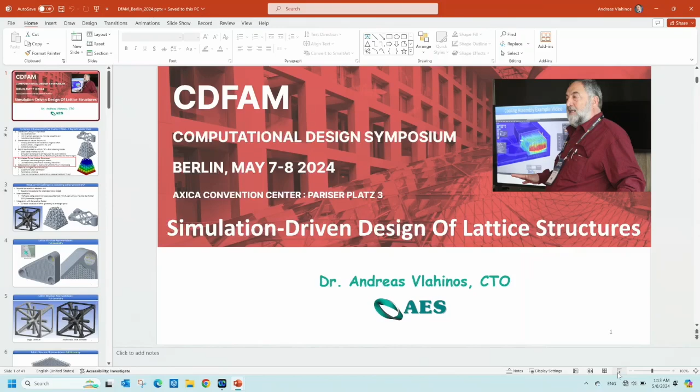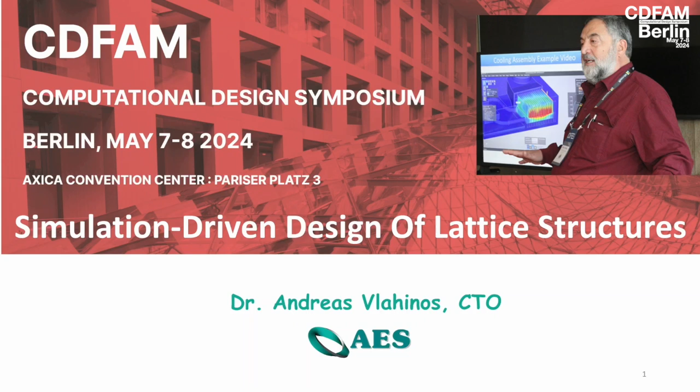And I can't stop working because these things are so much fun. We live in really exciting times. We do things we couldn't even dream or imagine before. Okay, so very exciting stuff. My first 2 decades, I was a professor at the University of Colorado, but I worked all the summers for the industry, so I was practical. In the last 20 years, I do consulting for defense and aerospace, especially solving new, unique, and difficult problems for SpaceX, Lockheed Martin, General Dynamics, BAE, practically all defense and aerospace contractors in US and some in Europe, like right here in Germany, Italy, Norway, I mean, all over the place. Because it's fun, I enjoy this stuff, and this is sort of, you can pass the enjoyment to others. We have a 3-day masterclass on these things.

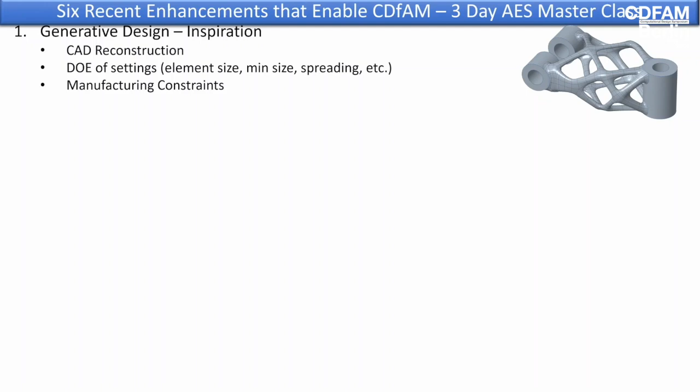What are they? First, generative design. Say, wow, that topology optimization has been around for 30 years. What's the big deal? It is a big deal because you can do CAD reconstruction with a push of a button. You can do DOE, design of experiments, on the factors we use to tune up, and you need the expert and the PhD guy to do it. You know, like element size, minimum element thickness, spreading, etc. So you do DOE so you can generate hundreds and hundreds of optimum feasible designs. So the task is, which one do I need after that? And of course, we have manufacturing constraints. We couldn't dream having print orientation direction with 45 degrees 6 years ago, okay? So super exciting. I won't talk about it.

Generation of lattice structures. Lattice structures are used in nature for a long time, but nature is a very good designer, okay? It has a lot more experience, failures, etc. But nature is a very good designer and uses lattice structures. We couldn't use them before. 6 years ago, we couldn't even imagine that. Why? Because we couldn't manufacture them. We couldn't even build them in CAD. Now we can. Super exciting, amazing geometries. And also, we have now custom lattices. You can visualize a dream of a lattice unit cell, make it custom, and use it.

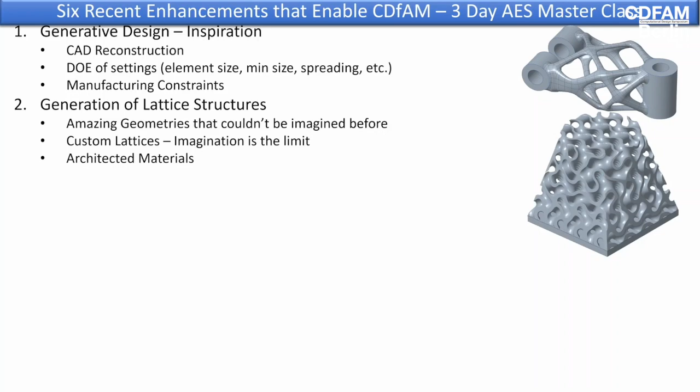And the other one, architected materials. Wow, you say, what's a big deal? The big deal is you can get properties for response, like mechanical properties, like stiffness, thermal conductivity, porosity, etc., which don't exist in nature. So if they don't exist in nature, how do you get them? Well, it's a combination of the materials. So we can get 0 coefficient of thermal expansion. It will be that exciting for the people. They fight thermal stress, you know, stuff like that.

Then the next big deal out of the 6 is real-time simulation tools. I'm in the industry for 40 years. I never thought I would be able to do real-time simulation, let's say conjugate heat transfer. Say, what is real time? Oh, you have a big computer. No, they use the GPUs, and they don't use finite elements. They use voxels. So what? Well, now I can do static, modal, thermal, CFD, conjugate heat transfer. So big deal. Okay, you can see it fast, but is it accurate?

We'll talk about it. Simulation results become features on the model tree. Because it's fast, if I regenerate the model, I can see the pressure drop. So what? Well, if it's a feature, I can do sensitivity, I can do optimization, I can do multi-objective design studies, I can do statistical design studies on the fly. I don't need additional software. And if you can do optimization, you don't just do good designs, you do great designs. I won't talk any more about these things. If you need this stuff, you take the class.

Simulation-driven structures, lattice structures. There are a lot of challenges there. We can generate amazing geometries, so we can grasp the form and the fit. But how about the function? Will it work? Will it break? Will it overheat? Will it vibrate? Will it flow?

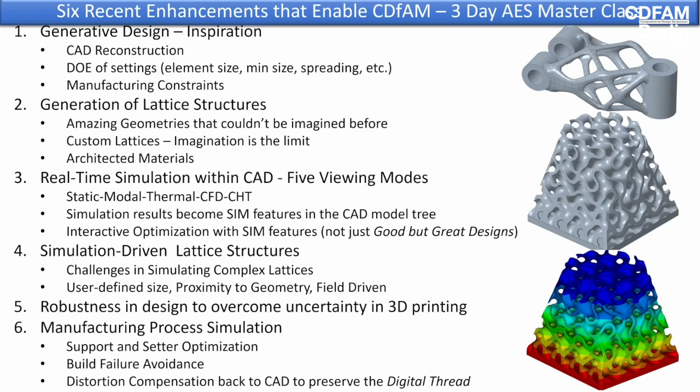Okay, we're going to focus only on this talk because we don't have 3 days—on simulation of lattice structures and robustness.

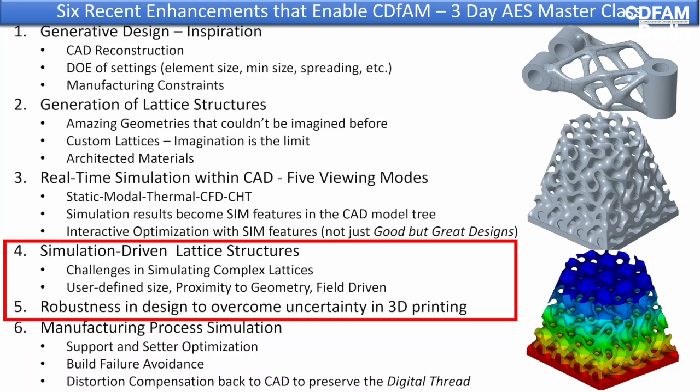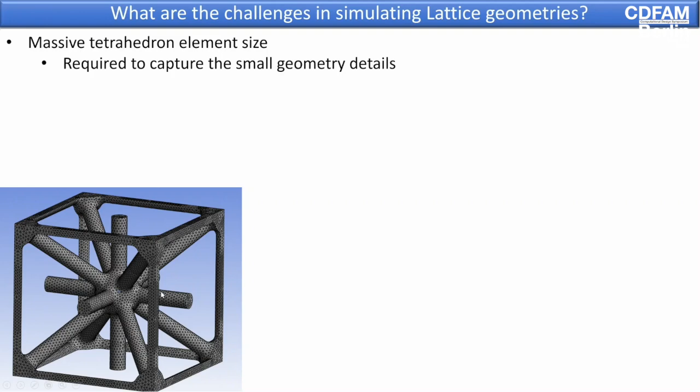What are the challenges in simulating the lattice structure? The first one is massive element size for tetrahedrons, required to capture the details. If I have a unit cell like that, it has a lot of elements.

The other one is interoperability. We have all these beautiful, powerful tools—they can generate TPMS, gyroids, and diamonds. And then what we used to do: save it as a STEP, go to ANSYS, bring the STEP in and solve it. We can't save these as STEPs. Say, what happened? Why? Well, it's totally different geometry—it's implicit or voxel-based, so I can't do that. Ouch. So how do I deal with that?

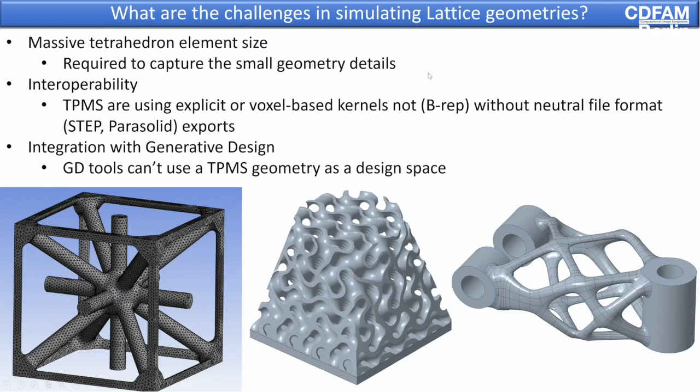And the other one: can I use my TPMS as a starting point for generative design? Or how can I combine generative design and lattice structures?

I'll go a little bit quickly on some of the current solutions. We try to fight the wars with the army we have today, not the army we're going to have 5 years from now. We want the CAD vendors—and some of them listen and do it, and I'm really excited working with them.

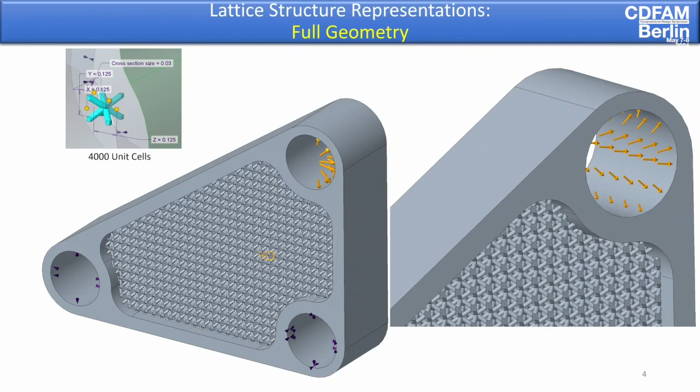We have full geometry representation. So if I have a stupid little bracket like that, and I load it, and I have a little unit cell—about 4,000 unit cells—I can do it with full geometry, B-rep, a lot of elements, but these FEA solvers are fast.

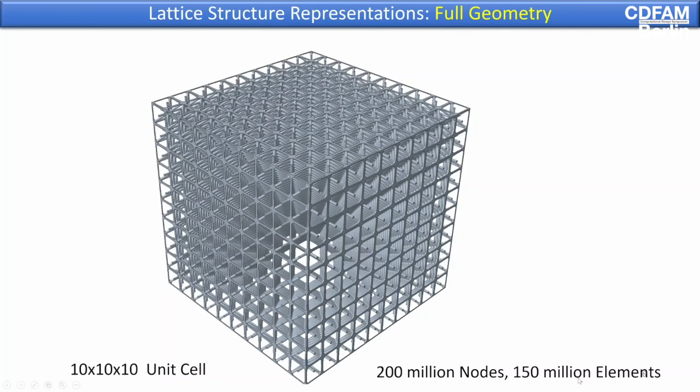If I have a single unit cell which looks like that, and I mesh it accurately, I have about 200,000 nodes—200,000 for one unit cell. Now if I have a 10 by 10 by 10, I have 200 million nodes. Totally impractical for realistic problems, which have several million of those. You can see the engine at SpaceX for the Crew Capsule.

So the other option: we want them to not give me full geometry representation, give me a simplified representation—so I can use it for beam and shell elements. Really give me the beginning and end of the beam. Say, how can you design this? You can't even see the intersection, you cannot see the balls and the fillets. It doesn't matter.

The human cannot see it, but 3MF can send it to the printer, and the printer knows what to do. And the simulation software understands beams and shell elements.

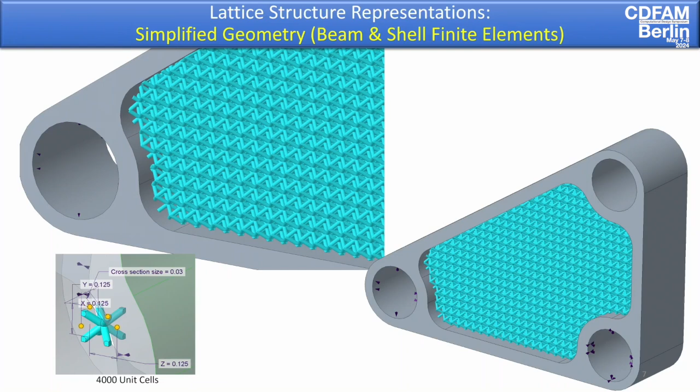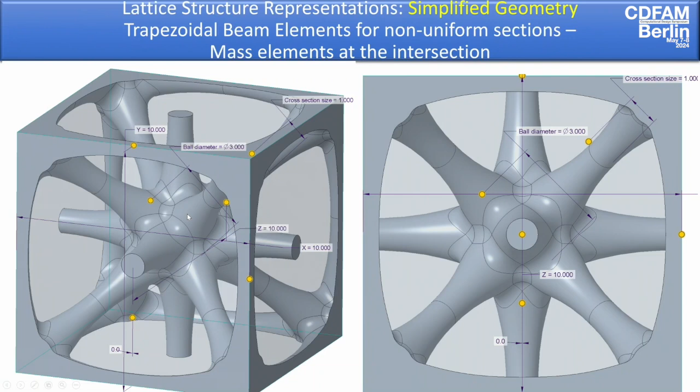So if I have something like that, and it's a parabolic beam, it breaks it into 3 and makes trapezoidal beam elements and adds a mass element of the appropriate size at the center. So if I have non-uniform sections, I can do trapezoidal beams.

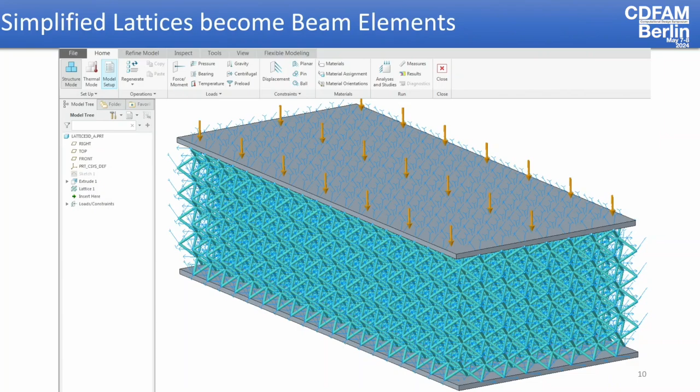So if I have a lattice structure with a bunch of beams like that, I don't do full geometry, I do simplified geometry. So now I have a bunch of beam elements. This shows the coordinate system of a beam element. But the beauty is the user does not need to transfer the nodes and elements.

It automatically transfers beams in the simulation software. So if you look at it closely, you will see beams and solid elements wherever they're interacting. That's much more reasonable to do.

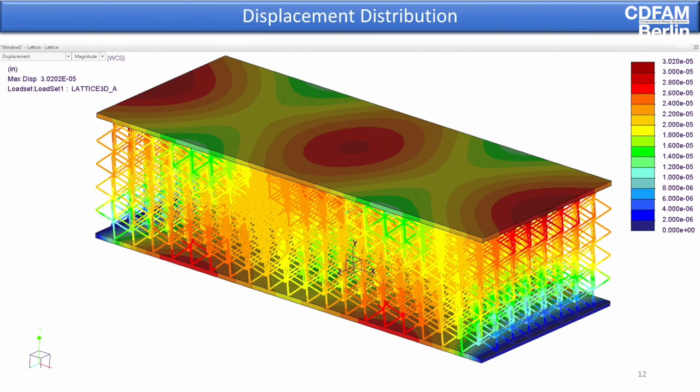So you can load it and find your deflection, accelerations, velocities if it moves, natural frequencies, but don't expect to find stress concentration at the corner between this and this, okay? Sub-modeling needs to happen there if you're really interested in that. So you need to understand, I can't really capture the stress level at that corner, but I can use it to do rapid optimization so I can find the optimum lattice structure to generate that desired natural frequency.

And if I have 2.5D structures, I want them to become shells. I want to extract automatically the midplane. And that happens today—whatever I show you today is released software. I'm not paid by any software vendor, so I'm not going to tell you the software tools we use, but you can see the shells and the beams interacting, and it's very easy to do that.

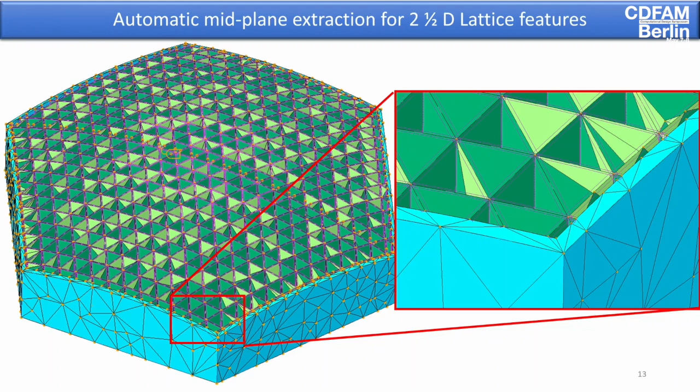Now, someone said, yeah, but if you have 1 million cells, even that won't cut it. Yes. Then we use homogenization. We take a unit cell, squeeze it in all 3 directions, find the equivalent material properties, and set up a solid element with these properties, and solve for that.

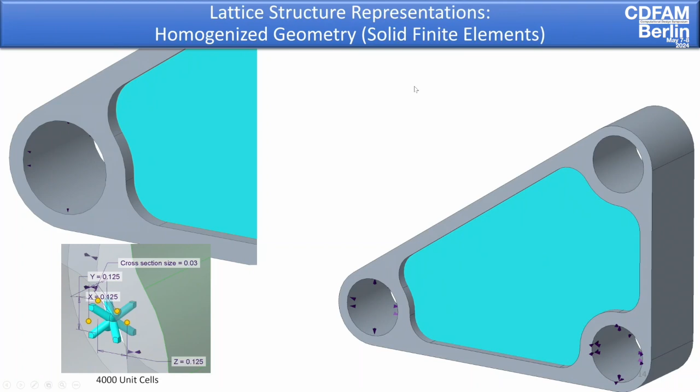Of course, don't expect to find stresses here, okay? But you can find natural frequencies. You can do optimization. Now, let's talk about how do we simulate.

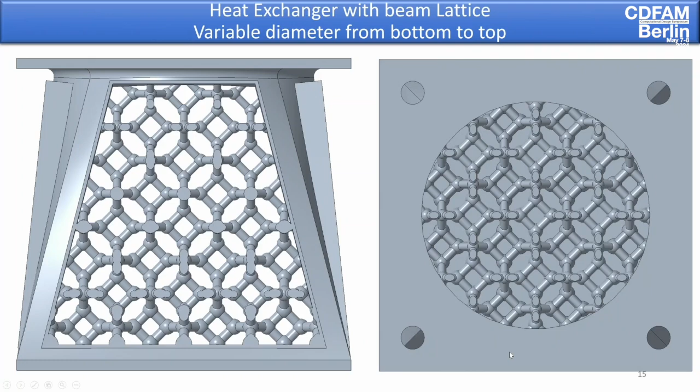Okay, we saw that, but let's say if I have a little heat exchanger for a chip with variable diameter from bottom to top, if I look at it like that, that's where I put the fan. How do I analyze that? Believe it or not, there's some tools today which provide you real-time simulation tools. What do you mean real-time?

Well, once upon a time, we had 4 viewing modes in a CAD system: hidden lines removed, shaded with edges. Now we have one more: simulation results. Because the simulation is fast, you can see the results in real time. It takes more time to regenerate the CAD geometry than to solve it. I'm not kidding. Whoever doesn't believe me, I'll show you.

So in real time, you can change, let's say, the size of the unit cell and find a new temperature. Change the diameter of the unit cell and find the temperature. Super exciting stuff.

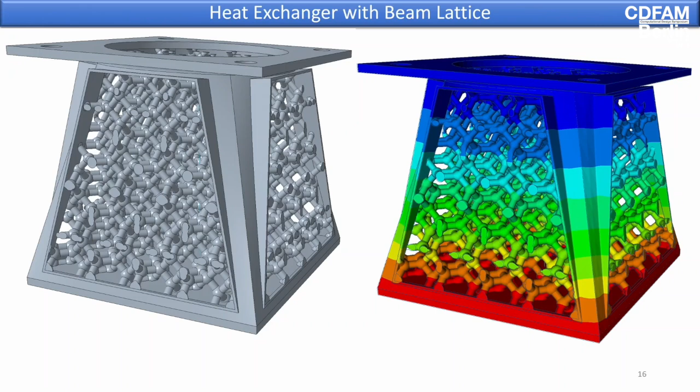It's really a spell checker or Grammarly for design. You do it real time. It's like you have over your head somebody with a foam hammer. Every time you make a mistake, bing—oh, you exceed the yield. All right, let's go back to that, or don't add that hole, etc.

And you might say, yeah, the structural and thermal are easy. I know, I believe you. Also, you can do real-time CFD. How? Well, it automatically computes the fluid domain, and it does it.

What is the secret? There are two secrets—don't tell anybody, okay? One uses the GPUs, and the other doesn't use finite elements. It uses voxel-based methods. And because most of these geometries are voxel-based and implicit, the transfer is very fast.

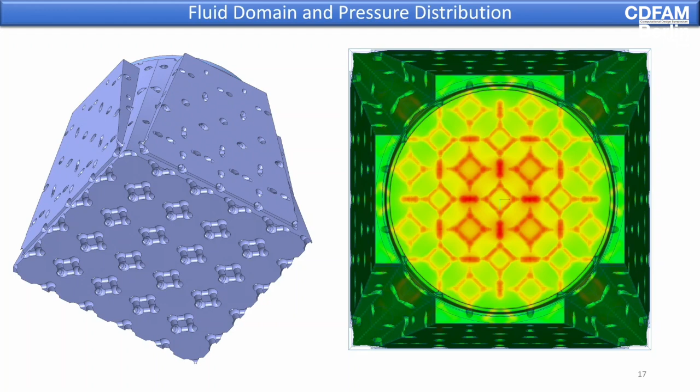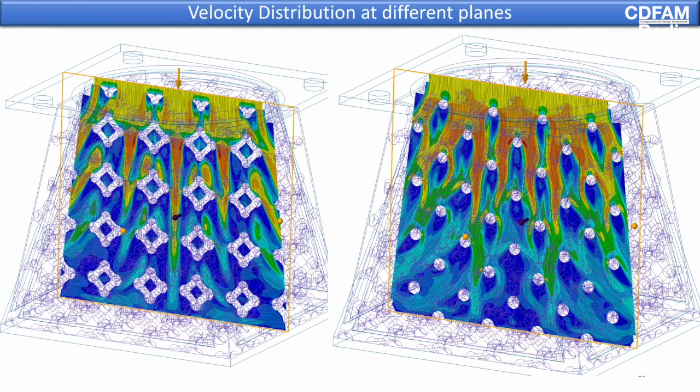So you can find the velocity distribution and the pressure distribution, and you can cut it in various planes, and you can see this is real-time stuff, okay? I'm not talking about sending it to the cloud and waiting a week to get it back. This is real-time on your machine—change viewing mode if you want to see the CAD model, see it in different planes. You can have the unit cell because it's parametric, you can change anything, and you can see the flow lines.

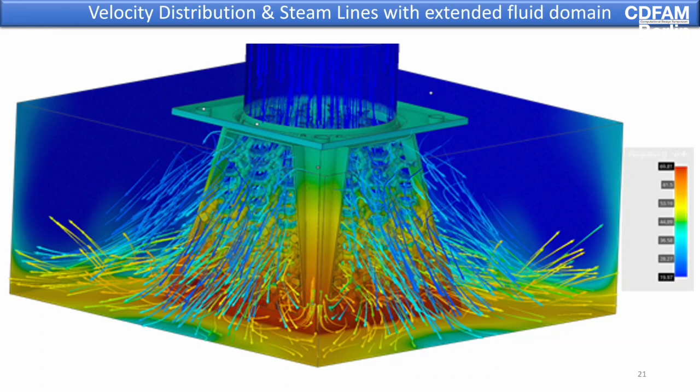If you add a little bit extended fluid domains, you can see better accuracy on the results. And you say, yeah, but that's too good to be true. There's no way you can have that speed with accuracy. Of course, most of our customers fly things in space, so they can't take the risk of having a software tool which looks good but isn't accurate. So we did a comparison for this particular problem.

This is super exciting, okay? Because customers like Lockheed and General Dynamics ask, can you please show me some NAFEMS verification problems? Those are simplistic - they're solved by mechanics, they're not practical. Let's do real problems, okay?

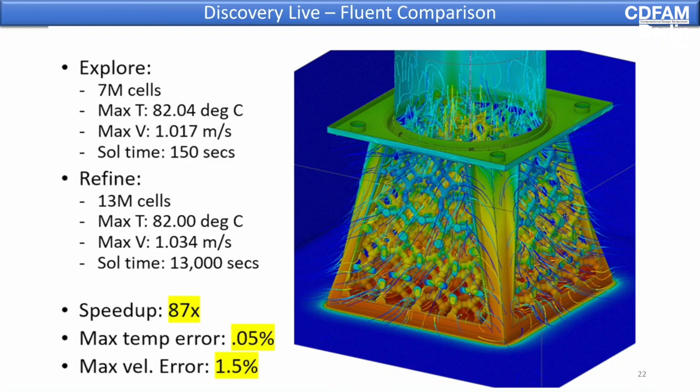I had to show a heat exchanger because that's the one we're printing today, actually, as we speak. So we can very easily find in gyroids, because it's voxel to voxel, the simulation results and find how they behave.

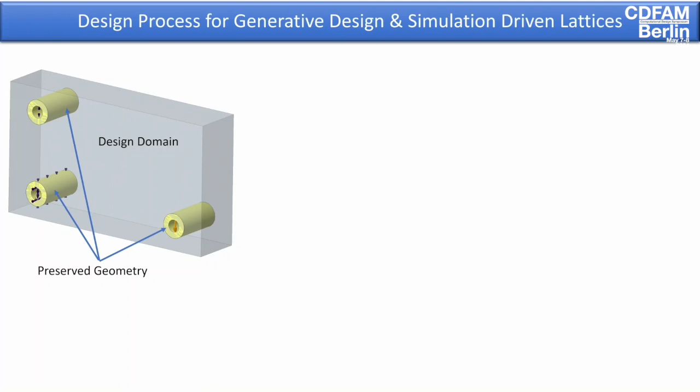And also you can say, how can I combine generative design and lattices? Well, one simple technique we use: we take the initial design domain, identify the preserved geometry, and select an appropriate unit cell to use. We don't know which one, but we select one, and we do homogenization, so we try to do generative design with the homogenized material properties, okay?

So it's not as strong as steel, it's, let's say, 20%, because it's the homogenized geometry, but I get that. Then the next step is, before you do anything, you go find the stress field. You do a stress analysis, and you find the high stress and low stress areas, and you save it as a point cloud X, Y, Z von Mises, let's say.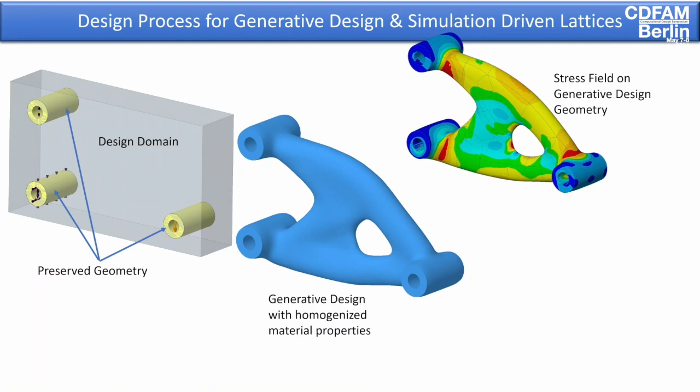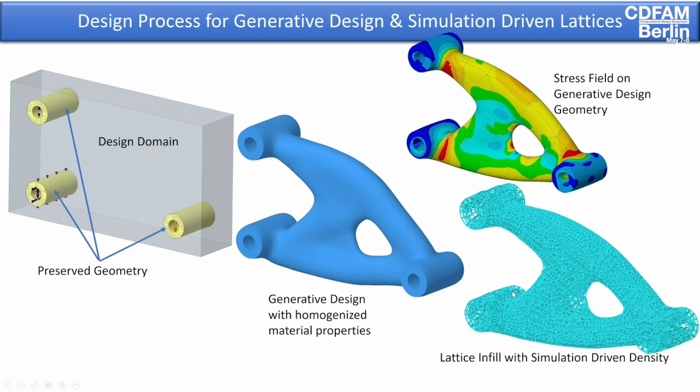But it doesn't need to be von Mises. It can be temperature, it can be a lot of other cool things which I don't have time to show you now, but take the class. Anyway, then you say, okay, let me infill the lattice structure based on the simulation results - more dense they are, less dense they are, etc. I think nTop introduced that concept a few years back, and a lot of people follow.

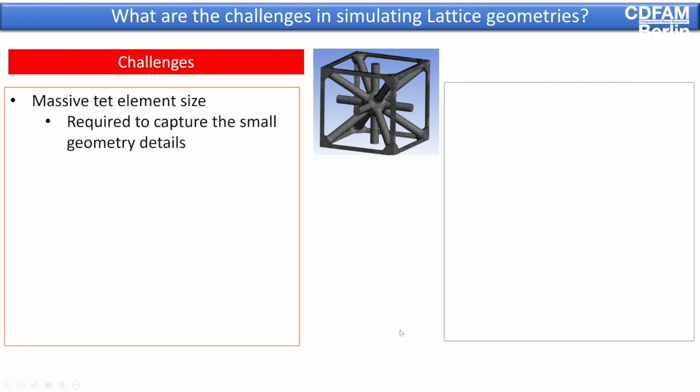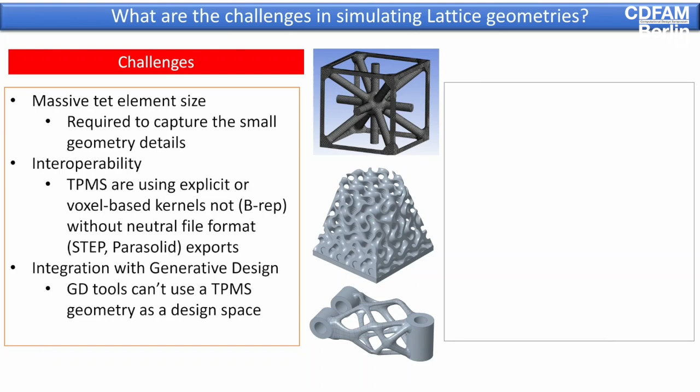In summary, the challenges are massive element size, interoperability of TPMS and implicit, and integration between generative design and lattice. How would the solutions be? Have various geometric representations of your lattices, so they're not only for the human eye and visualization, but for downstream applications like printers.

We have structures where the STL doesn't work - we have to bypass STL. So if they're beams, we use 3MF. If they're complex lattice structures, we use CLI, common layer interface files. We slice it in the CAD system and then send it down, or use homogenization.

In real-time simulation tools, understand voxels and understand implicit geometry, so you can do amazing things with that. And in generative design, use homogenized material properties and simulation-driven lattices for infill.

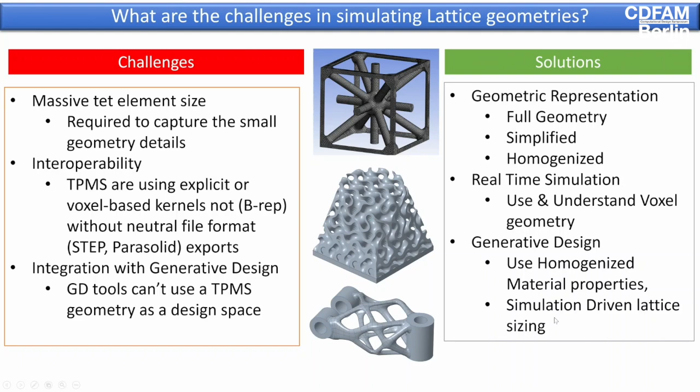If I do the same summary graphically: if I have between, let's say, 1,000 and 5,000 unit cells, regular full representation geometry will work great. If I have between 5,000 and 500,000, simplified like beams and cells will work fine. If I have up to 100 million, well, you need homogenization with uncertainty.

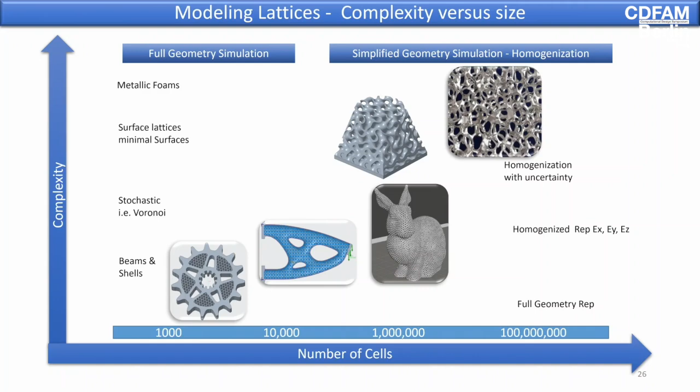What the heck is uncertainty? Everything is perfect here, we specify what we want. We'll see that in a few minutes. So typically, the simulation-driven lattices, we have a field, and we can either put more dense field, put more material where you need it, if it's stochastic, and if it's regular, you adjust the thickness here.

Some people like nTop can do both, and some can do either, okay? So this is really exciting because I don't need the user to specify what is the diameter of the lattice - the simulation tells you.

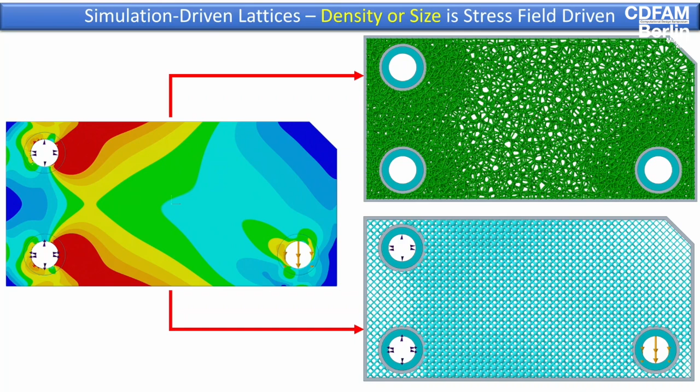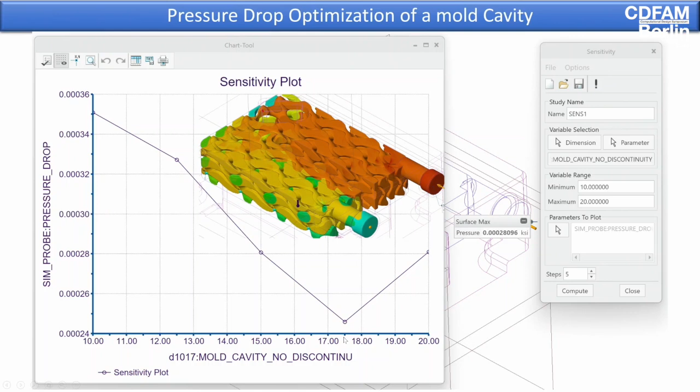And then how do we size the lattice structure? That's one example. We had the target for pressure drop. What is the gyroid unit cell size? You plot gyroid unit cell size here, pressure drop, and say, aha, that's the good one. I'll do this one, okay? So that's about simulating lattice structures. It's super exciting tools to generate. The only thing you need to learn from the first part of the talk: imagination is the limit. For generating lattice structures, use simulation-driven lattices to size it.

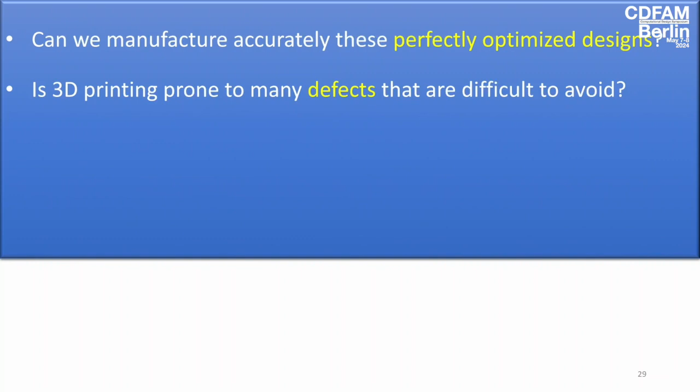Now, a few more questions. Can we manufacture accurately these perfectly optimized designs? What do you think? No. Is 3D printing prone to many defects? They're very difficult to avoid. Yes. How do we apply robustness in design to overcome the uncertainty in manufacturing? What, you want me, the designer, to take care of your problem because you can't do something accurately? Yes.

And can we design for Six Sigma quality level? The idea is, okay, in the good old times, when money and cost wasn't the issue, you say, okay, go to the minimum possible diameter, the minimum possible thickness, the worst material, and the maximum possible load, and design for it. You over-design, because not all bad things happen at the same time. So we need to introduce statistics and say, I can live with 3 parts per million units failing. Or, I can live with none. So not all bad things happen at the same time.

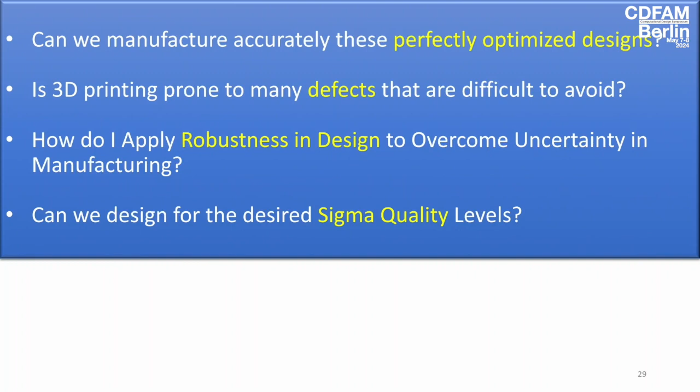How can I deal with that? Okay, and I searched on the web, by the way, design for Six Sigma quality with CAE, and a paper of mine came out on top, which I did 25 years ago with Ford Motor Company, okay? So there's not a lot of new things there. These techniques have been out for a long time. How do we deal with them?

Well, let's say I have a primitive, a gyroid, and a diamond, and I can plot the aspect ratio versus the volume fraction. So I can have the same volume fraction, and I can find, oh, this is 0.853, this is 0.65, 0.512 millimeters. That's exactly what I want, and that's exactly what I expect.

And then you print it. And from far away, it looks good. But then if you look at it a little bit closer, you say, what are these steps here? Well, those are the layers. Okay, and why is this not exactly that? Wait a minute, you mean the printed part is not exactly identical to my CAD model? Yeah, it's not. That's the reality. Oh, you say something like, oh my God, and you can see how there is a difference.

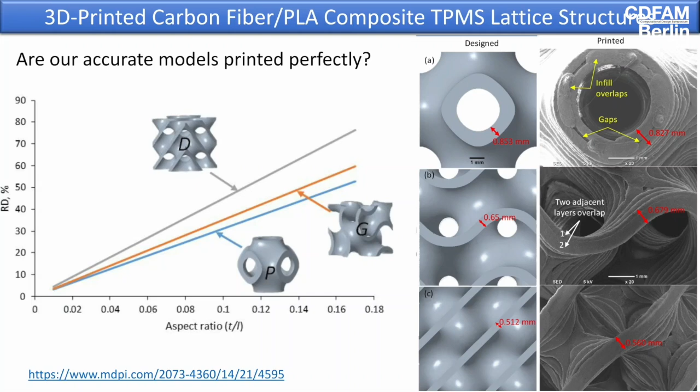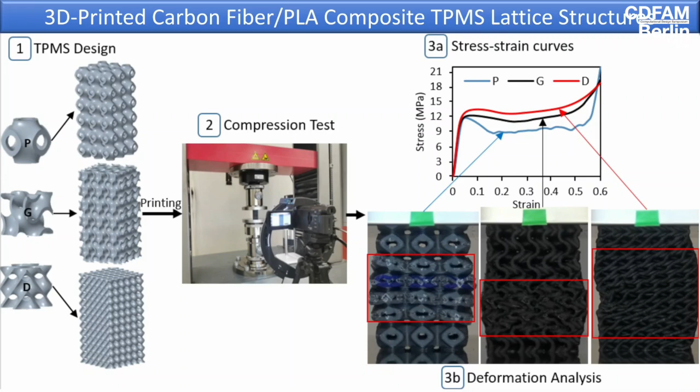And say, oh, this is polymers. Don't worry, let's go test it. You test it and you realize that you have different performance. The diamond outperforms the other guys if you test them, in compression. But the real loads are not compression only, okay? You have torsion, you have buckling, you have a lot of stuff.

Let's go to metals, man, forget this plastic stuff. And you go to selective laser melting for 316 stainless steel, and you look at it closely and say, darn, I thought this was a cylinder. What is this roughness here? You tell me I can predict the fatigue if it's a smooth surface, and fatigue depends a lot on the surface roughness, and now this is inside?

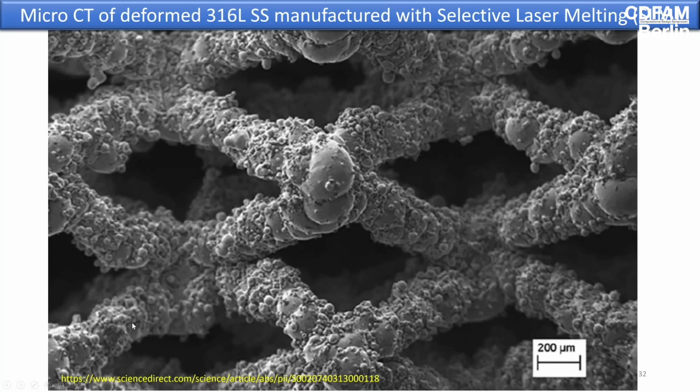Oh, you don't want to see it if you're a designer. This is too rough. Or you try to see the porosity if you do a CT scan, and you see there's a lot more porosity at the joints and there. Oh my gosh, and I was assuming modulus of elasticity for steel. What is this? You mean this is not uniform inside? It has porosity?

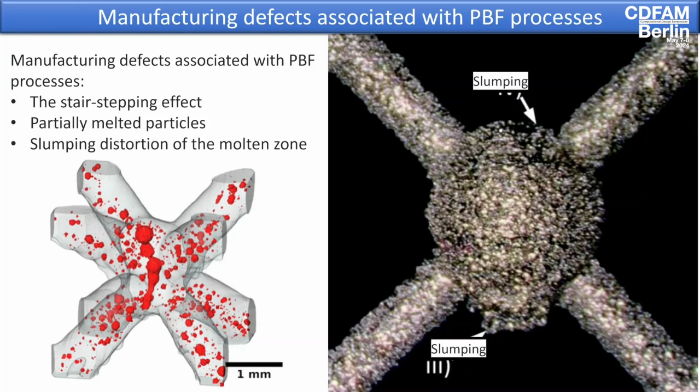Did you do thermal treatment afterwards? Did you do any hipping? Yes, and it still has that? I said, oh, gee, what am I going to do with this?

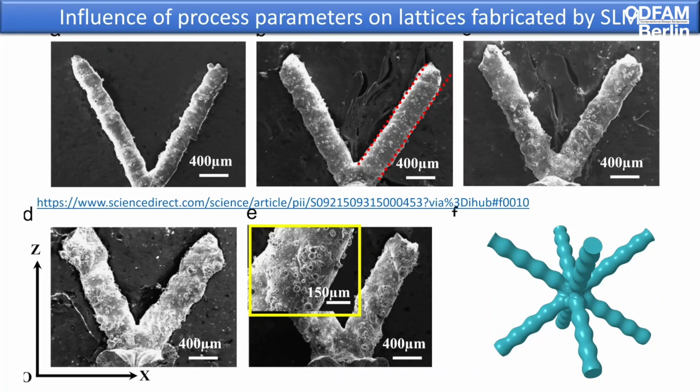So that wouldn't work. Wait a minute now. Now you scare me. I have a nice design. I have a fast simulation. I do this. And now you tell me I can't even model the variation and the imperfections?

Well, here's what you can do. You can come and do a CT scan on 316L and find the thickness here and the thickness here and the thickness or the diameter here, and you can do a statistical analysis of the thickness, and you can give me the mean and standard deviation of the thicknesses.

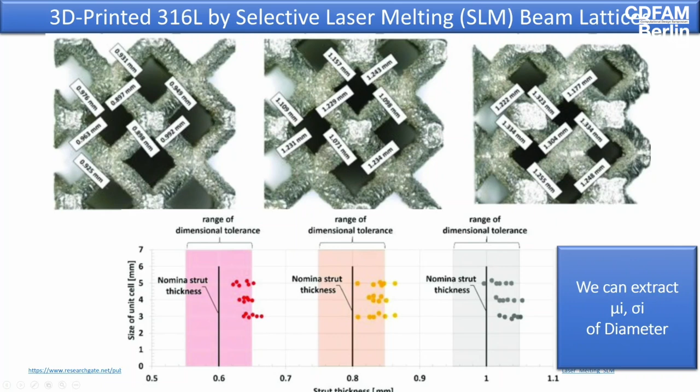So what? So now you know that it was 0.99 with standard deviation of 0.01. So what? What can you do? Well, now there is a fear on the designer and engineer, and he asks the question, is my optimized design safe at the presence of variation? That's the question. So he's really nervous now. I optimized the stupid thing.

Like what? I'll give you a simple example we use in the class. Let's say if you have a landing gear cylinder, there are two parameters, the radius of the tube and the thickness of the tube. And what we do, we have buckling constraints, stress constraints, and feasibility constraints. Feasibility, the radius needs to be greater than the thickness, okay? If you don't say these things, the optimizer gives you crazy results.

But that was, so you draw that line, R equals T. This is the design space, radius and thickness. We need to understand this concept so we can go to the robustness.

Then you can plot the equation for buckling. The buckling load is P, K, L, E, I. So you solve this equation and you plot it. Everything above the red line won't buckle. Everything below, it will buckle.

Then you say, OK, let me plot the other line, which is the stress equal to the yield stress times the safety factor, and you have that blue line. So everything below the blue line, it will fail. Everything above the blue line is good.

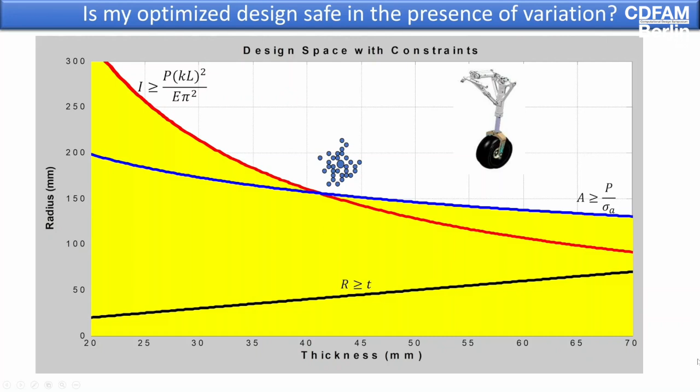It's not that big a deal. You have performance requirements, performance targets, upper and lower specification limits. In other words, the safety factor needs to be greater than 1.2, the natural frequency should be more than 200 hertz, the buckling load should be 1.8 times the actual load. Stuff like that - performance targets.

And then I don't know where to start. Well, you identify the parameters that have variation - such as what? The loads, the materials, the dimensions, and the range.

We know from a lot of studies that the loads follow log-normal distributions, the materials follow Weibull distributions, and the dimensions follow normal distributions. It took us years at Ford to do that study.

But we identify that loads do that, because you can say I design a car, but would you please avoid potholes? Because otherwise your lower control arm may fail. If you're in Detroit, you don't have a choice. But...

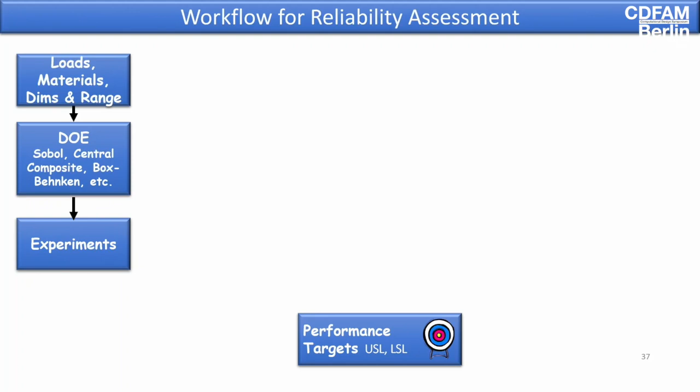And then you generate the experiments. So far, I specify the design variables, I do the DOE, generate the experiments, and then I execute a bunch of CAE runs. How many? As I told you, it depends - you take the available time to produce the project, divided by how much is a single run, and you select that many.

And then you build a response surface approximation - that's how I call it. Nowadays they call it machine learning. My dad used to call it curve fitting, okay? So it's all the same thing. Don't be panicking - oh my God, machine learning. It's just a response surface approximation.

But now it's fully automated because we have the power to do that. So if you specify a bunch of inputs and a bunch of outputs, you can generate multivariable response surface approximation.

Then you need to check the goodness of the fit, because you can be fooled. Is that approximation good? How we do that - I can explain you another time - because we plot the predicted versus computed, and we see if they're around that diagonal. One simple technique - so visually you can say, okay, that's good.

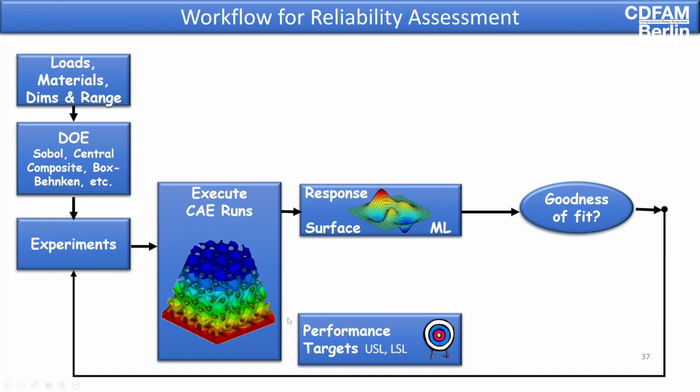I'm within 3%. After that, it's trivial because you have the mean and standard deviation you measure from the variation. And you can go to Latin Hypercube, make a big sampling, let's say 10,000 random experiments, pass them now through the response surface, which takes no time, and you generate probabilistically the response.

So I have now a bunch of numbers for, let's say, stress level. So what? What are you going to do with them? Well, I'll find the mean and standard deviation. And then what I will do - I'll find the mean and standard deviation of the response variables.

And I have down there the targets. So what I'll do, I'll find the sigma quality level, which is really how many standard deviations do I need to move from the mean value to reach my target. And then you find your sigma quality level, and you design for uncertainty.

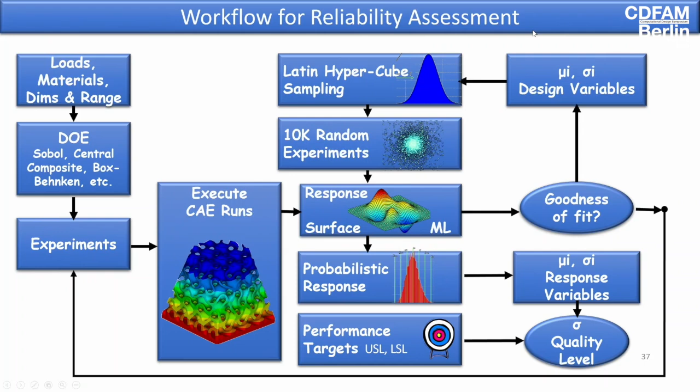Now, for some of you with their gritty nerds, you can see that - if that's the input, let me annotate. I think I can annotate. If that's the input and that's the output, I can put this in an optimization loop so I can find the optimum mean and standard deviation to generate the sigma quality level. That's for the nerds in the audience.

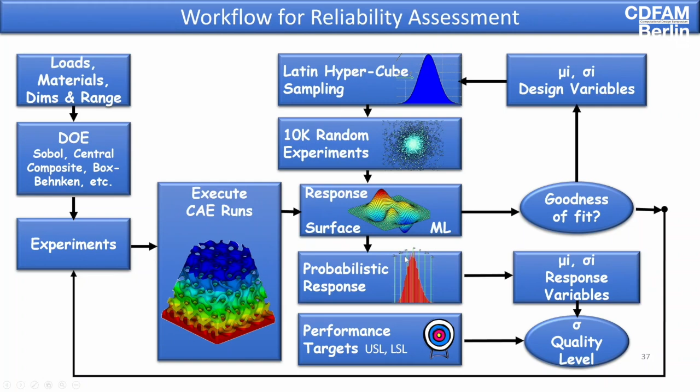I don't do this because they give me a day or two per project like that. So if I go back to this particular example, and I have uncertainty quantification, I can do something simple. I can find the red beams and the yellow beams.

What red beams? Well, reds are from 0 slope to about 30-degree slope, and from 30 degrees to 45 degrees, I can call them yellow. So I have yellow beams and red beams.

And what do I do with them? I assign the right mean and standard deviation we measure on the CT scan for the yellow and red beams. So the red beams have wider spread, the yellow beams smaller spread, and the rest of the beams no spread.

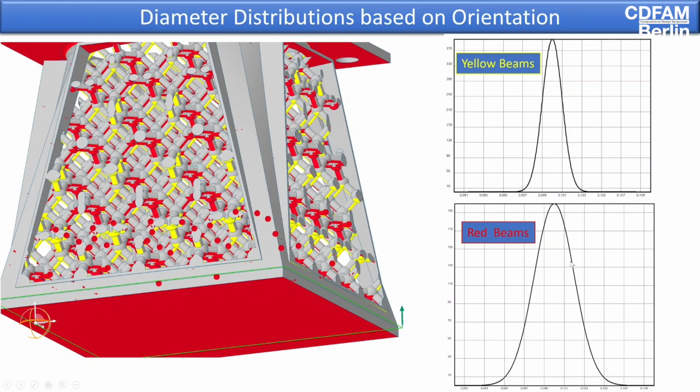So now I have the mean and standard deviation of the input, so it will be trivial to do the outputs. For temperature, I can do the process I showed you before, which, by the way, don't get scared, is fully automated within the good CAD and CAE systems. If you use Creo or NTOP or ANSYS, those things are there. They have different names - Design Explorer or Statistical Design Studies, or in NTOP they have a block for that. So don't be scared. As long as you understand what you need to do, it's not a big deal.

It can happen automatically. And you can come down here, and if I can annotate again, you can show the sigma quality level is 1.06. That's not really good. And you can put the upper and lower specification limits, and you can find out the temperatures and the variations. I think I'm out of time.

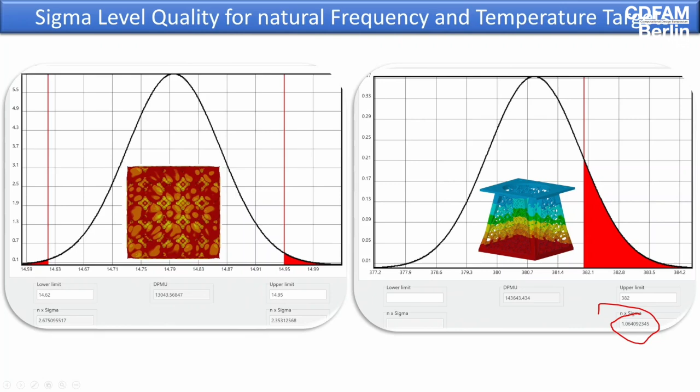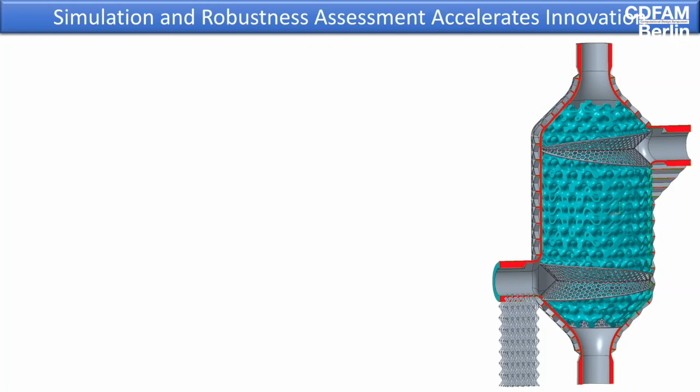The same thing here, and there is one underneath. There is a nice cone here of supports. So you need to pay attention to support the local minima, and a little bit outside. And here it's a beautiful design which, no matter where you look at it, is 45 degrees, no supports, because it's a 45-degree block like that, and it has inside a lattice with 45 degrees.

So, in summary, optimization techniques are great, but robustness evaluation is required to provide proof or evidence of quality. Andre will love this, because now that's what he sells. Apply robustness in design to overcome uncertainty in quantification. So we need to oversize a little bit the mean and standard deviation of our parameters to overcome that.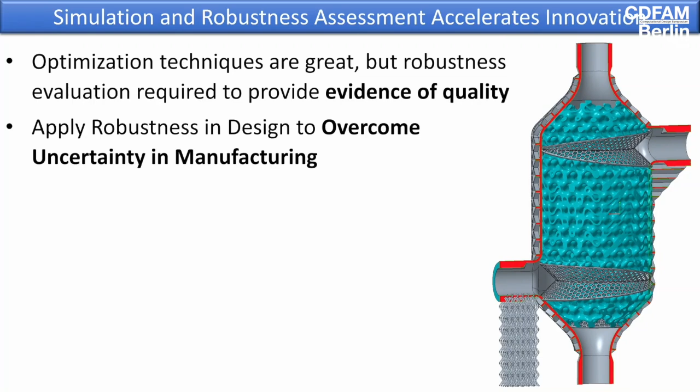In live simulation, what a joy to work with it. It promotes innovation because it makes the simulation experience interactive - you see it real time. If you don't believe me, at the break, give me a problem and we'll do it together. It's fun. And a bigger audience can understand that.

And here's some AI. For example, in the heat exchanger, if you apply heat on the bottom, you don't need to specify heat transfer coefficient on the rest of the surface. It assumes: okay, I will give you 20 C and 10 watts per meter square Kelvin as heat transfer coefficient if you don't tell me anything. So you apply heat, boom, and you see the temperature. Amazing stuff. This is by ANSYS, by the way - I don't get paid by them, all right? But it's ANSYS Discovery Live, and it's embedded within CAD systems.

And also start thinking a little bit more. What design limitations do you aspire to overcome using these tools? Think of your current design limitations. How can I overcome this?

And be daring and bold, because knowledge is power. So if it's so fast to get a response, don't be afraid to say, how about if instead of diamonds, I use IWP? How about instead of beam lattice, I use 2.5 beam lattice? How about if I make my design weird like that? You're not afraid to try a lot of things fast, which accelerates innovation. Thank you very much.